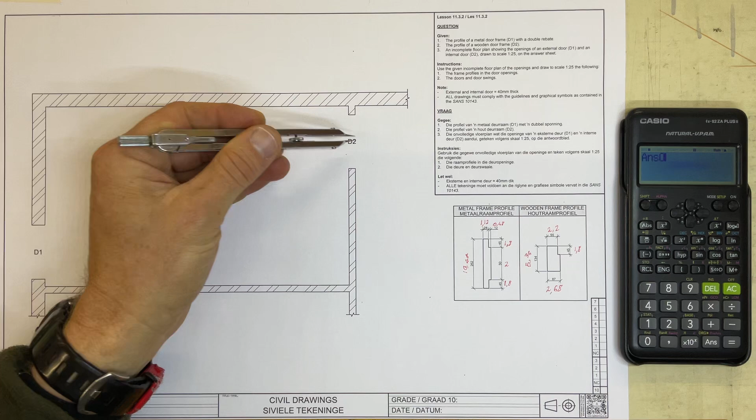All right, we're going to be doing the doors on this building. I've got an external wall and an internal wall. You can see they've got a D1, door 1, and a D2, door 2. For this D1, we're going to be using this metal frame over here, and we're going to draw that in. For this D2, we're going to be using this wooden frame over here.

You'll see over here that I've taken a calculator and divided these measurements by the scale, which is a scale of 1:25.

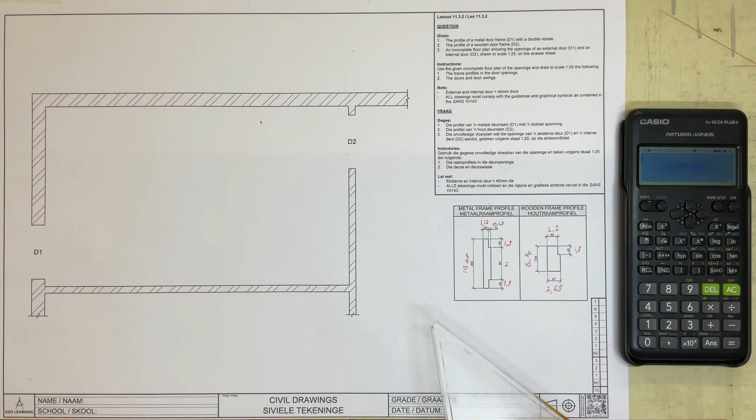I'm going to start by taking the distance of this 10.48, but I need to get that exactly in the middle of this thing. So I'm going to take a little line at 45 degrees there, and a line at 45 degrees there, and find the center of that wall.

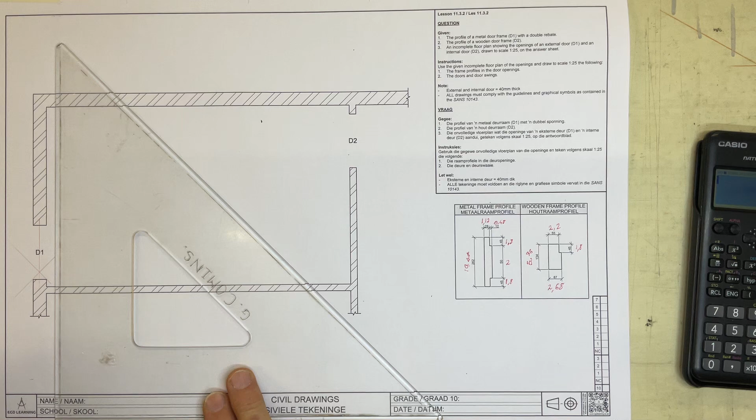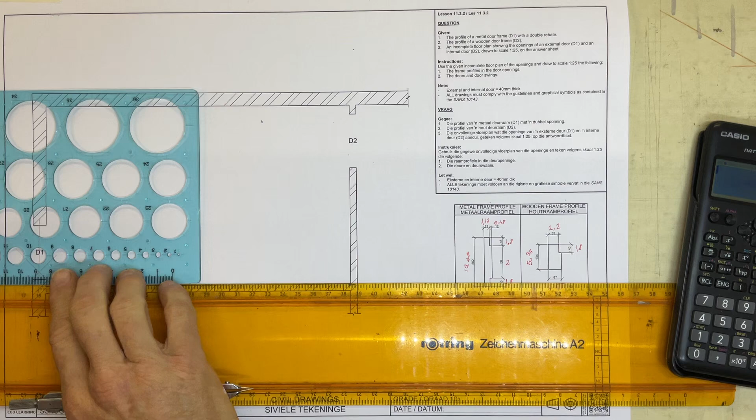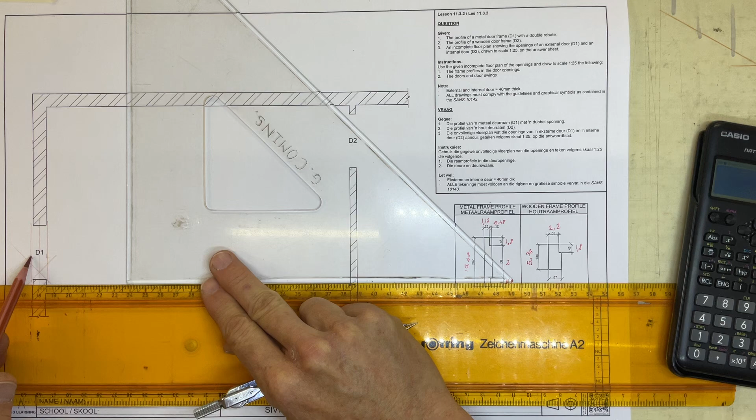There we go. I then take out a circle stencil. 10.48 is very slightly bigger than 10, so I'm going to take my 10 millimeter circle stencil and pop that in. There's the 10 millimeter circle stencil, and I draw a little construction line arc on either side of that. Since it's 10.48, I'm not going to go right up against the edge of that circle—I'll go very slightly out, just to give me that little extra on either side to get that 10.48. You'll see there's a small gap there, and a small gap there, just to give me that idea.

Once I've done that, I can draw in a line coming straight across over here, and a line straight across over there, and from there I can start measuring up.

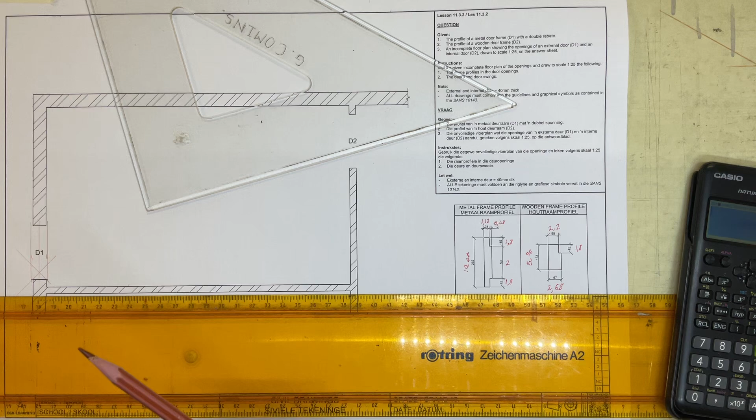It says I've got a 1.12 millimeter gap. You don't need to take a pair of dividers and try to measure that 1.12 precisely. You know what a 1 millimeter gap looks like, and you can guesstimate that quite nicely. It's approximately that sort of gap over there.

Once you've got that, it says you need to go out 0.48. So obviously if that's your 1.12, you're going to put a smaller gap coming out over there, just to get that smaller gap sticking up.

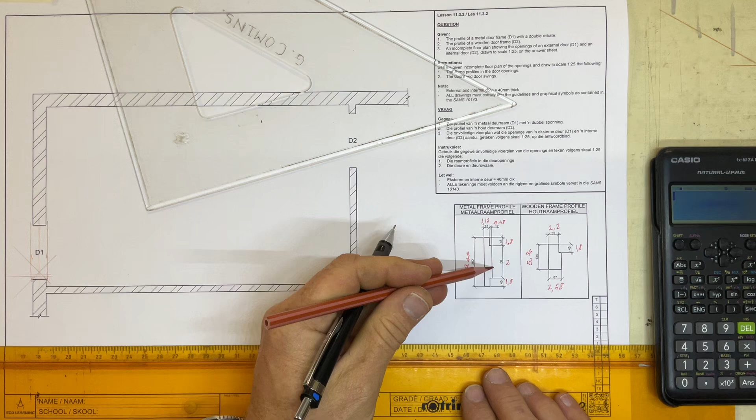I've got 50 millimeters over here. I'm going to say, well, I know that would be 2 millimeters. Take your 2 millimeter circle stencil and drop that in over there. It'll be there and there.

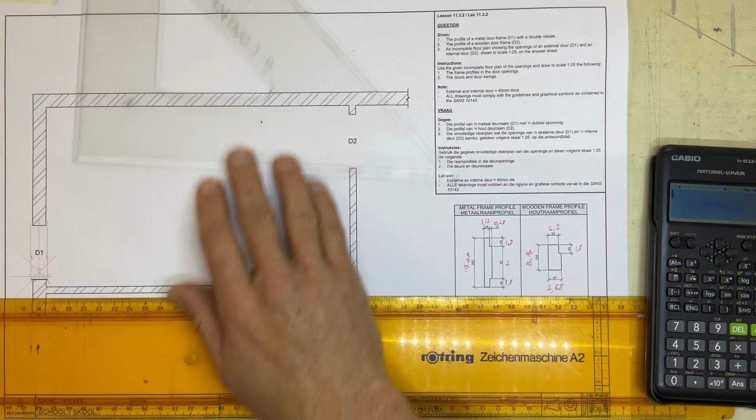That can come down a millimeter gap on that side, and a millimeter gap on that side. I can now draw in the story line going over there, a line coming down very slightly over here, a line coming down over there, a line coming across over here and over there, drop that down over there and over there, and we're going to do the same on this side.

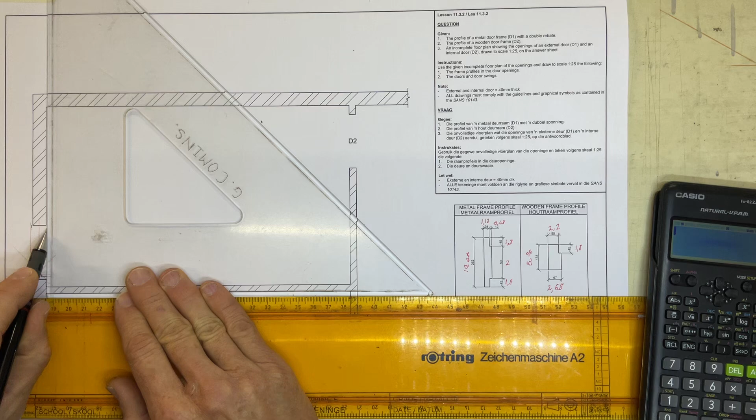Line coming across—let's get that in place so I've got some lines to work to. Line coming across over here, line coming across over there, small gap over there, line going across over there, line coming down in there and in there.

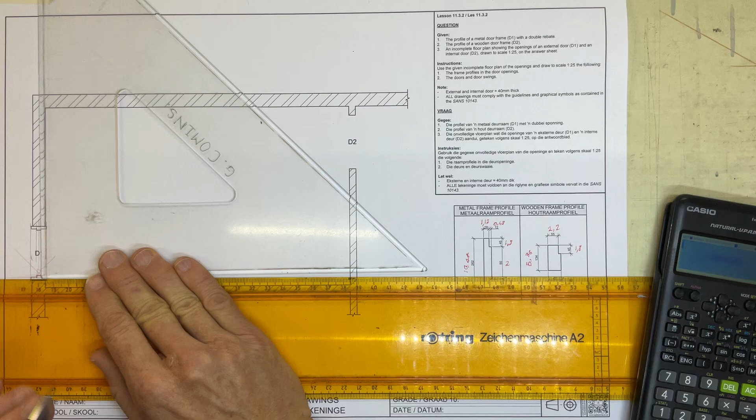It is an external door, which means I have a door that needs to swing in. Generally we say our doors will swing towards the wall. Note where the hinges of the door are going to go—the hinge would be at that point over there. I'm going to extend my door to that point over there.

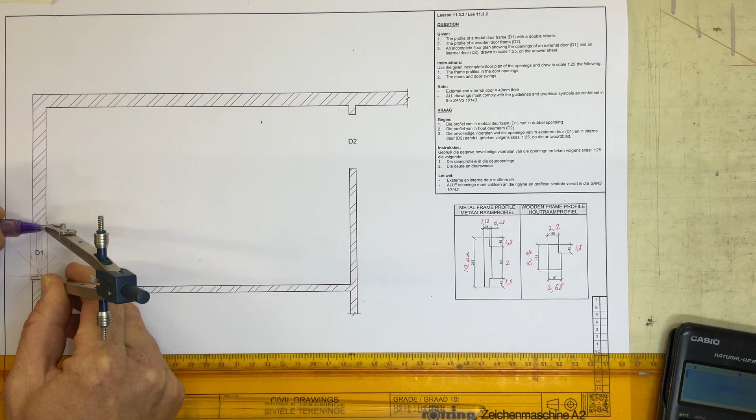Okay, so if you look at that internal frame, the internal part there, that's where my door is going to sit, my hinge at that point. I'm going to draw an arc coming around over here. And once I've done that, I'll draw in a nice dark line going up to that arc.

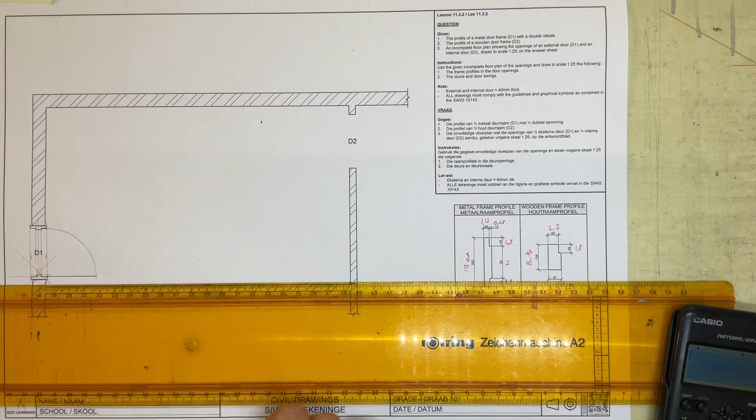What is the width of that door? Obviously it's going to be the same as that little gap over there. Pop that in here, mark it off, and now I can draw in a door which is going to go in like that, with a line coming across and a line going over there. There is our first door done.

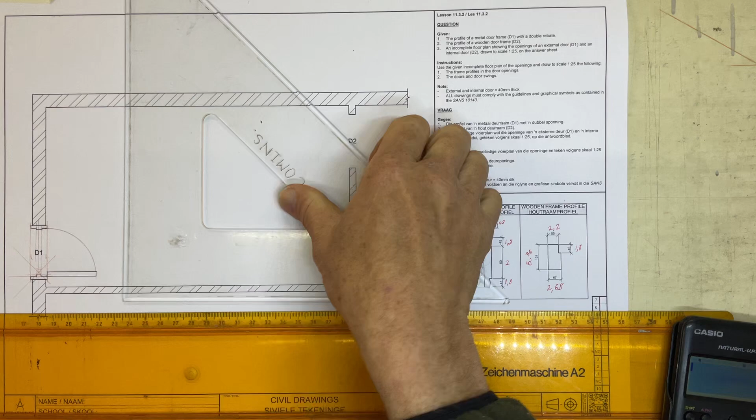The second one is a wooden frame over here, and I need to draw all of that out. I take this and get the center of that wall first of all. Just get me a pencil quickly here.

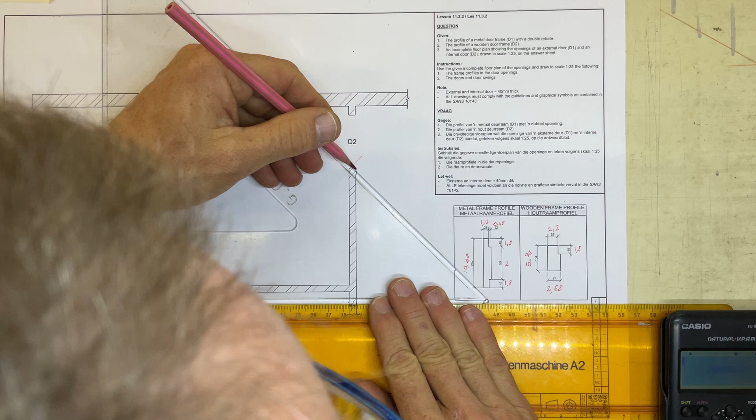I'm going to take a 45-degree line there, a 45-degree line over here, and drop a line coming down over here. And then I'm going to measure out.

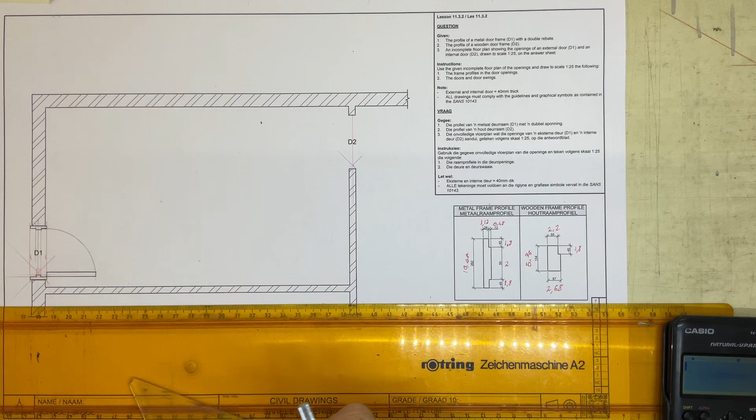It says 67 millimeters, that's 2.65 millimeters. You can measure that off somewhere over there - 2.65 millimeters going out, just draw a line coming out over there.

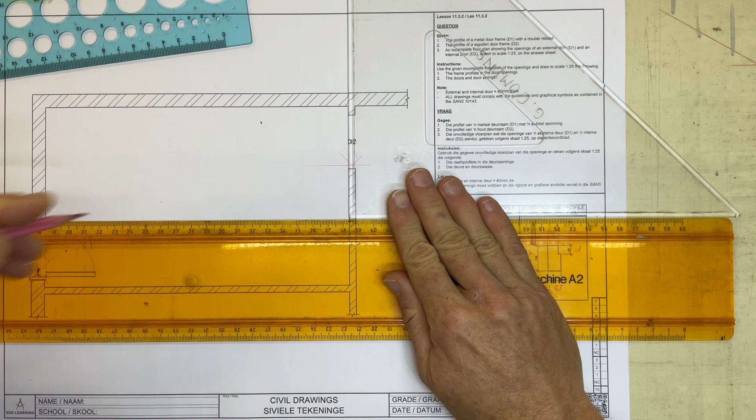It says this thing is 5.36 millimeters. So again, take your circle stencil, get the 5 millimeter circle, and draw a little arc on that side, a little arc on that side - just on the outside of that, to give a little extra than the exact 5 millimeters.

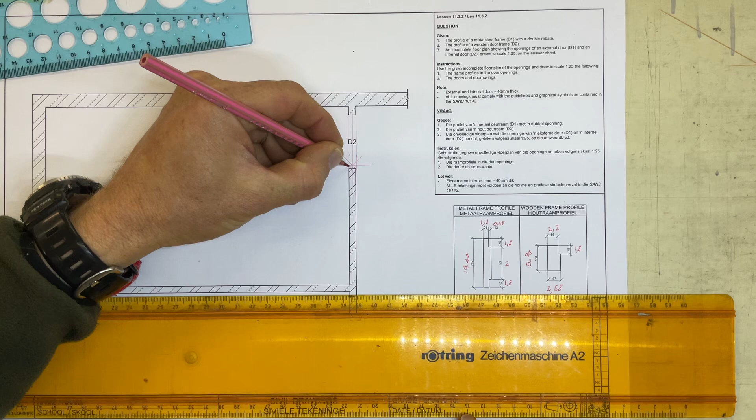Once I've got that in place, I drop this thing back. It says 55, that would be 2.2 millimeters going up over here - so 2.2 millimeters, that's about over there. And I can now draw in a line coming across over here.

It says 45 millimeters, that's 1.8 millimeters. So I go dashing back that 1.8 millimeters there, take that down over there, take that up to there, take this across over here.

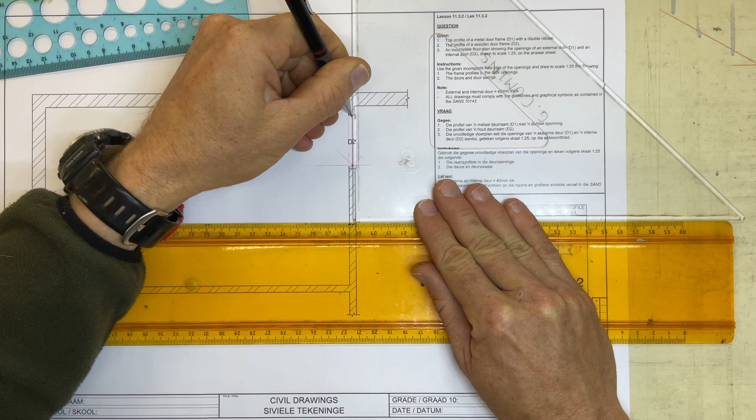Drop that down over here, and I have got that little stop in there. I'm going to do the same stop over here - little line coming up, that little dash down over there. Take a line coming across over here, take that across over there, and I have the little door frame in place.

My door is swinging towards that wall over there. I'm going to take my pair of compasses, stick it in where the hinge would go, take it across to where the door would slide into that gap - you can see it sliding into that gap over there.

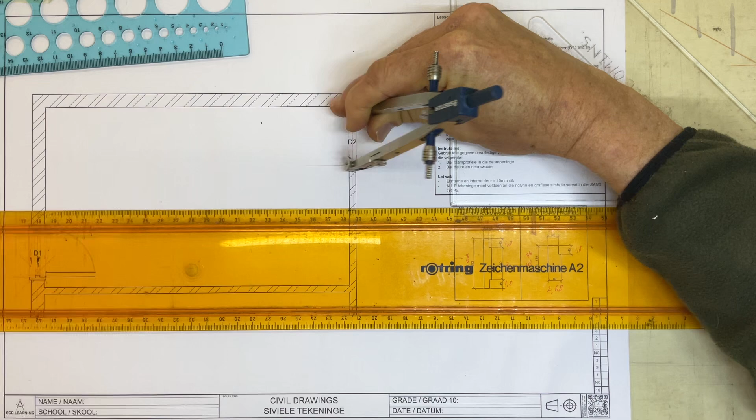I'm going to draw an arc coming around like that, take a line coming across over here, a nice dark line coming down over there.

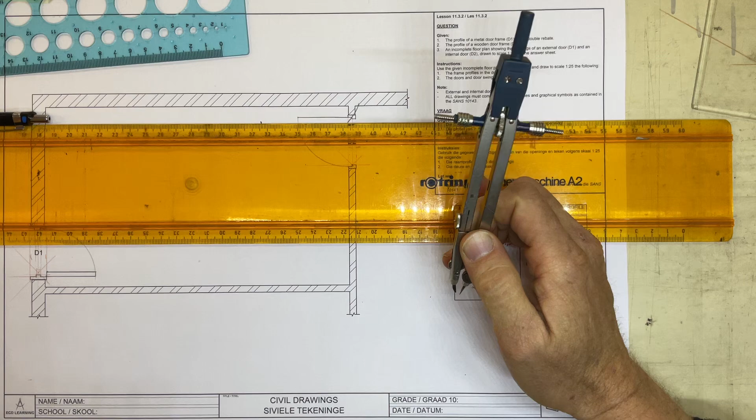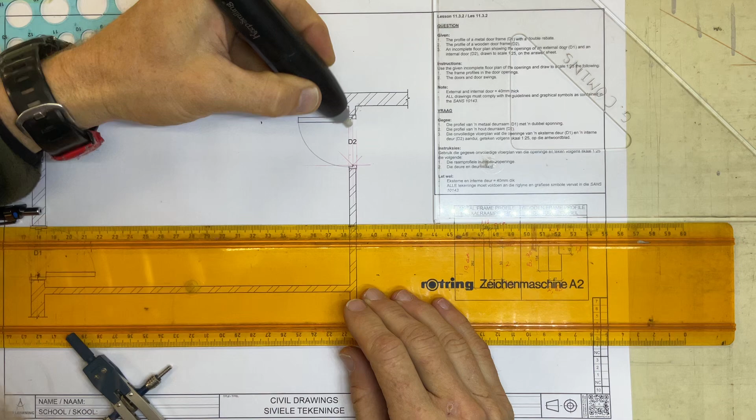And then repair the damage with an eraser. Hopefully this thing will work. Okay, just rubbing that little line out over there, and repairing the damage a little bit - it was a bit of a pity, but there we go.

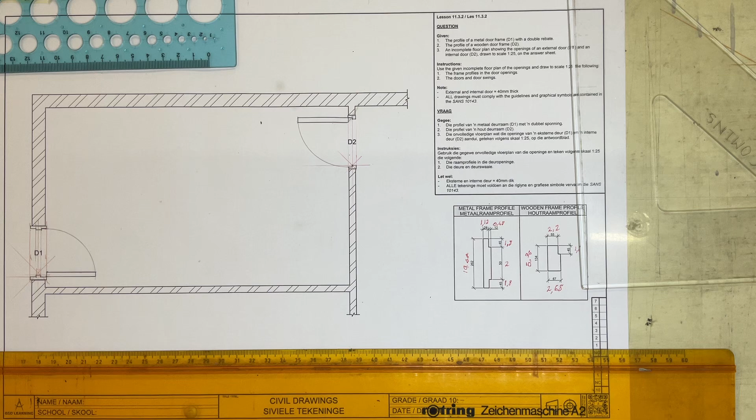Right, these measurements are very, very small. You'll note that the accuracy is not crucial, but try and get it as accurate as you possibly can.